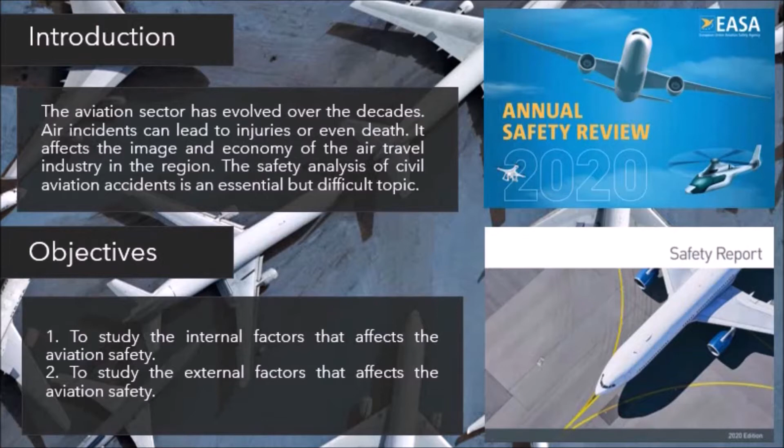Our objective is to study the internal and external factors that affect aviation safety. We adopt a qualitative study which utilizes secondary data as our main data source through observations, official documents, annual reports, and review of past research papers.

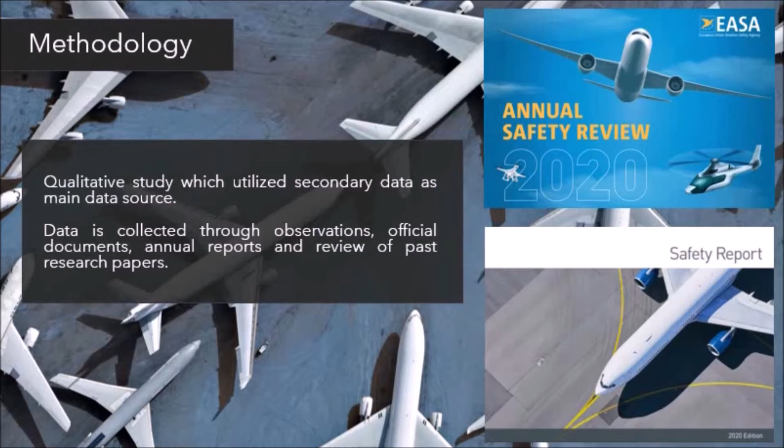Below are our findings. Internal factors are divided into human factors and mechanical failures. First human factor is the pilot or flight crew error. Human-induced factors such as improper procedure, poor skill, and decision-making are stronger contributors to loss of control in flight accidents. Even though it only accounts for 8% of total of 777 aviation accidents, it caused 2,462 fatalities from 2009 to 2018.

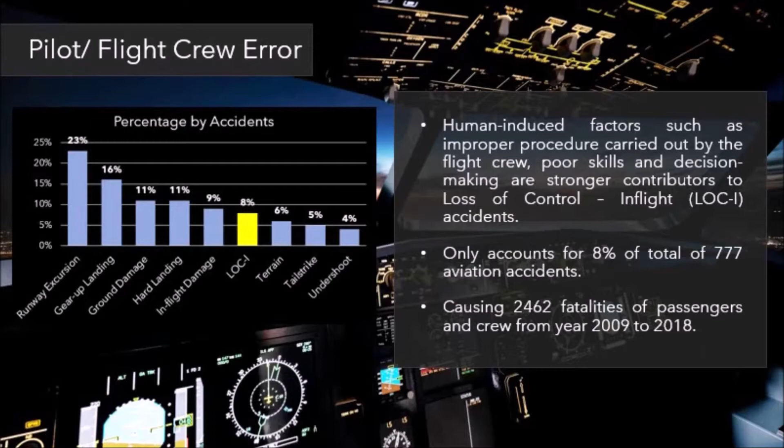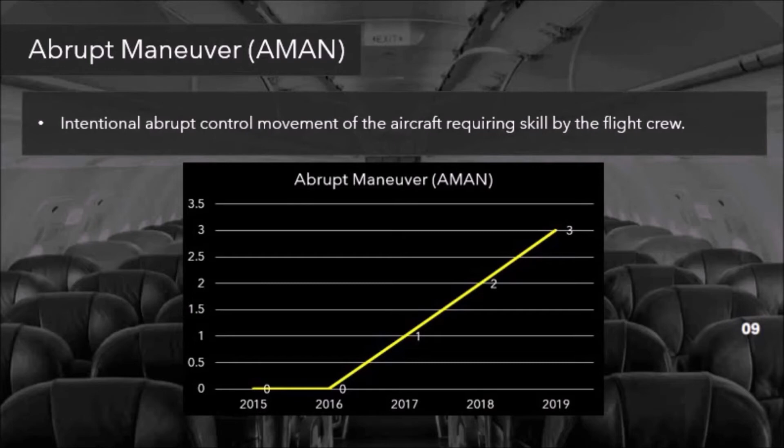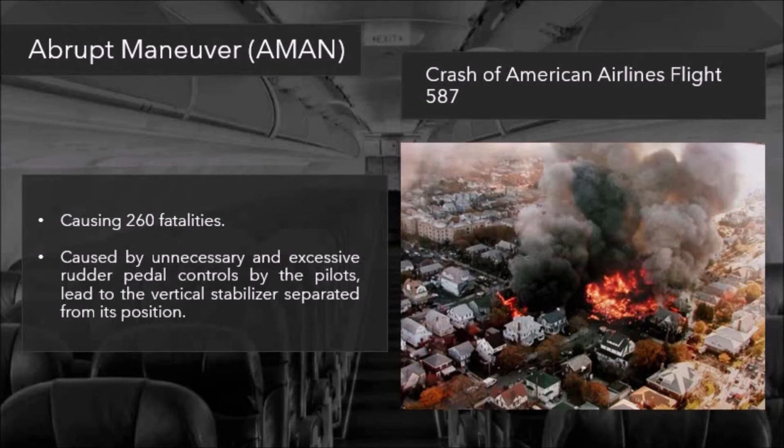Abrupt maneuver describes the intentional abrupt control movement of the aircraft requiring skill by the flight crew. Recent reports show there is an increasing trend in abrupt maneuver accidents. Crash of American Airlines Flight 587, causing 260 fatalities, was believed to be caused by unnecessary and excessive rudder pedal control by the pilot, leading to the vertical stabilizer separating from its position.

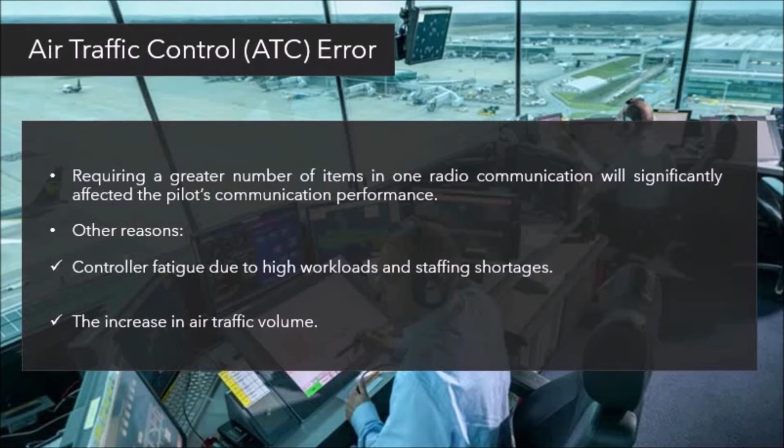Air traffic control (ATC) error. Studies show that requiring a greater number of items in one radio communication will significantly affect the pilot's communication performance. Other reasons include controller fatigue due to high workloads and staffing shortage, and the increase in air traffic volume.

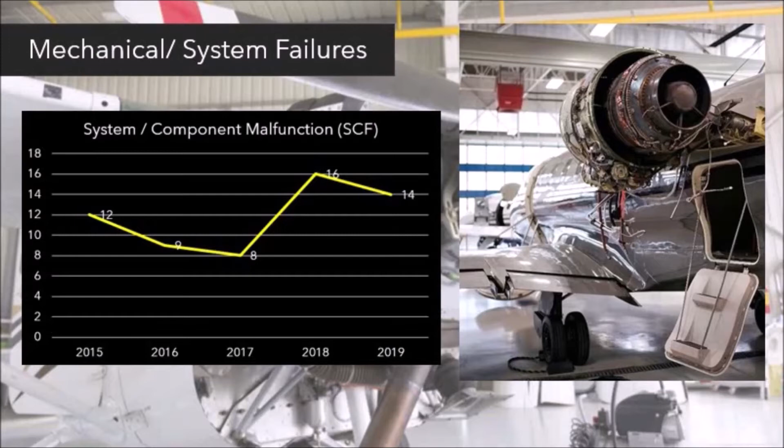Lastly is mechanical and system failures. Even though safety inspections are carried out before a flight, there is a risk where replacement parts may not fit and work properly. Below is the chart showing system or component malfunction accidents from recent years. The crash of Pakistan International Airlines Flight 661, which took 47 lives, found that a fracture pin caused by improper reassembly during maintenance activity had contributed to a complex combination of technical malfunction which finally led to the accident.

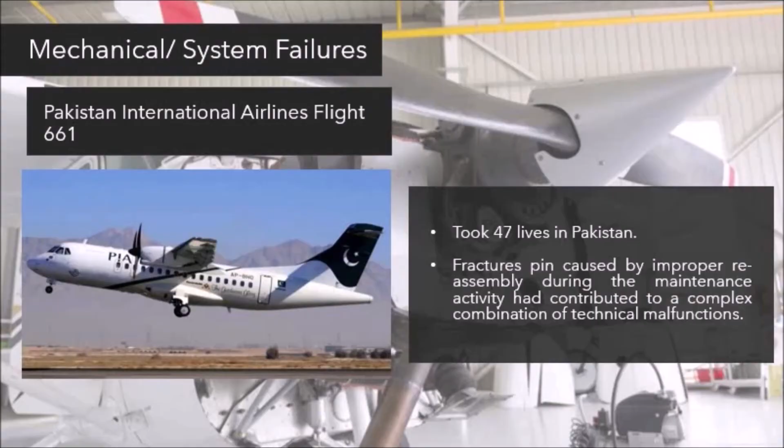External factors are divided into two: environment factor and foreign object damage (FOD). Meteorological and geographical factors will give impact to the pilot's behavior. Mountain flight conditions will improve in the morning, with more cloud and heavy wind mostly in the afternoon. For example, the crash of Turkish Airlines Flight 6491 that took 39 lives in Kyrgyzstan.

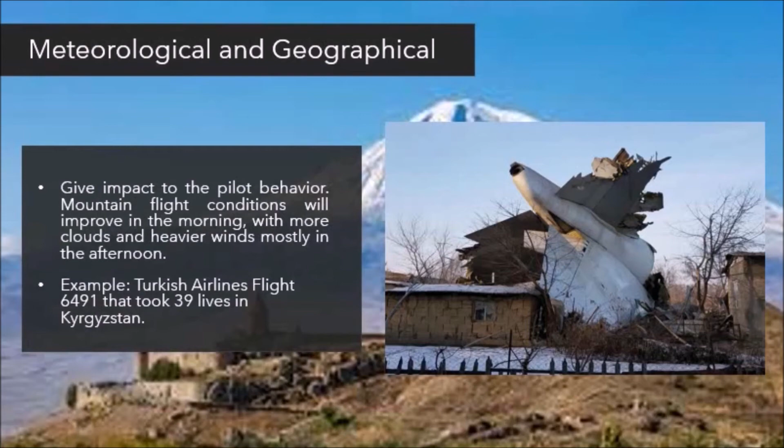Natural climate has an effect on aircraft and airport facilities, including volcanic activity and other aircraft-related environmental events, as well as weather effects.

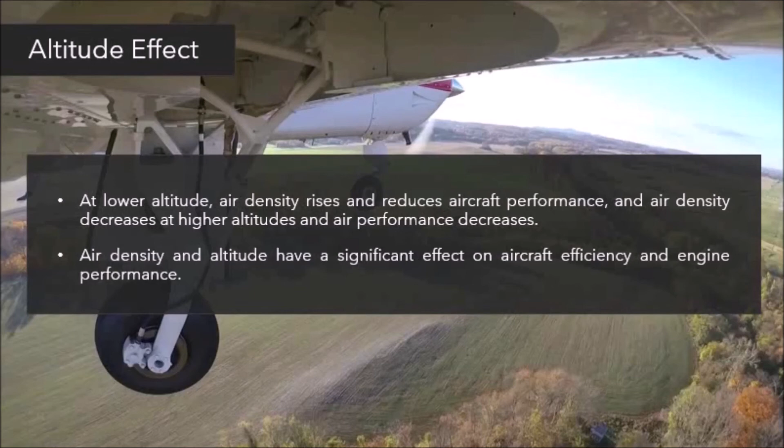Altitude effect: at a low altitude, air density rises and reduces aircraft performance, and air density decreases at a high altitude, also decreasing air performance. Air density and altitude have a significant effect on aircraft efficiency and engine performance.

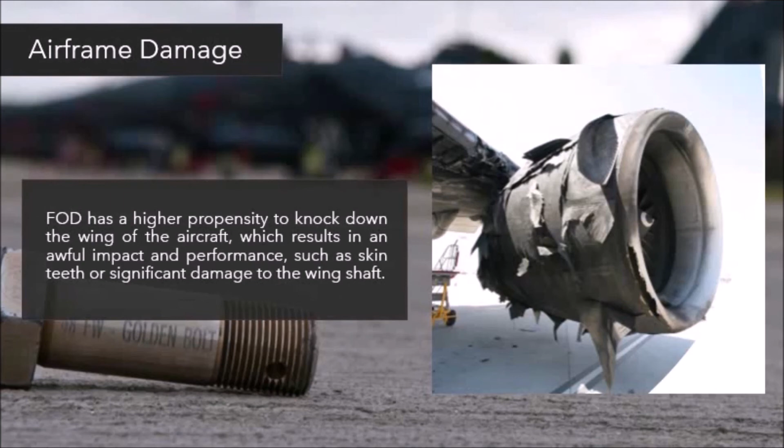Next is fuel efficiency. FOD tends to minimize the usable output of the engine. The blades are impaired and fuel consumption increases slightly.

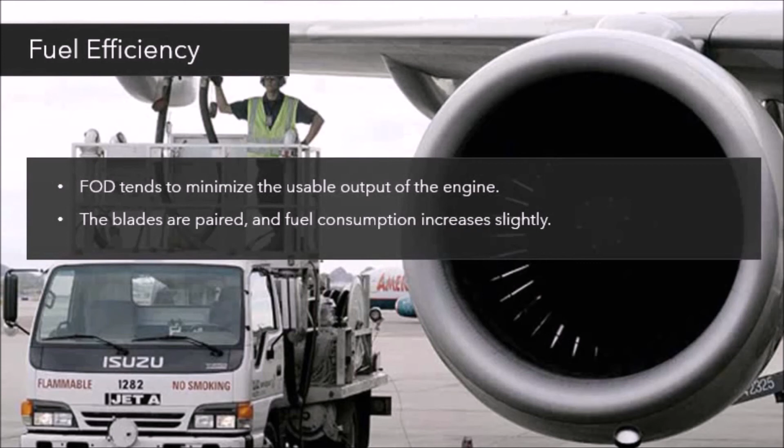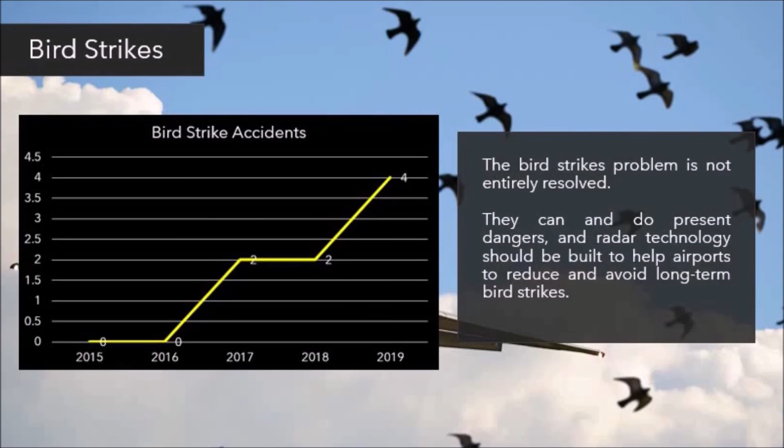Lastly are bird strikes. The bird strike problem is not entirely resolved. They can and do present dangers, and radar technology should be built to help airports reduce and avoid long-term bird strikes.

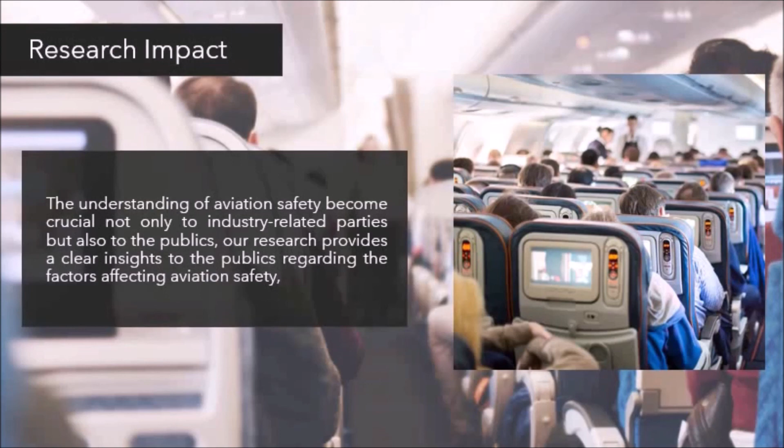The conclusion is that internal factors, especially human factors, are found to significantly affect aviation safety. External factors such as weather can increase the probability of other factors, and FOD has a more profound negative effect on flight performance.